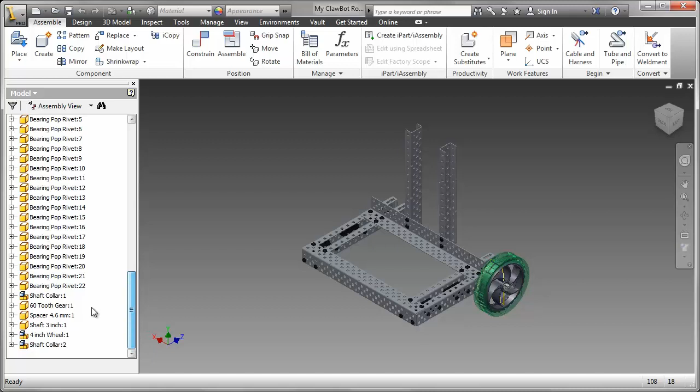With one wheel assembly created, we want to add the other three, but in a more efficient way. I'm going to use the same workflow that I used for the nut and bolt: select all of the parts in the wheel assembly, and then demote them or combine them into a sub-assembly. The name for that component will be 4-inch wheel assembly.

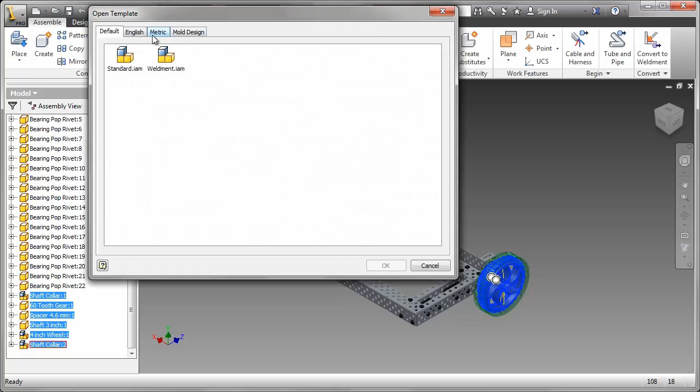I'm going to check that the template is correct. It should be an English standard inch assembly. Click on OK. We get some information, but that's fine, it's not a problem for us. And you can see all of those parts are now combined into a single assembly, and I can bring that into my model.

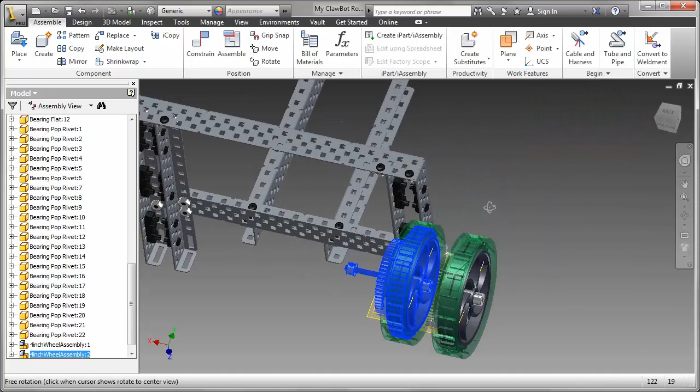Simply drag it into place. You can see all the parts are coming along. And all I'll need to do is apply one constraint, and that's going to be the insert constraint that offsets the drive shaft.

Select Insert, the circular edge. Keep in mind there are a couple of circular edges there, so be careful you get the right one. We'll be double checking this later. My offset is negative 0.375.

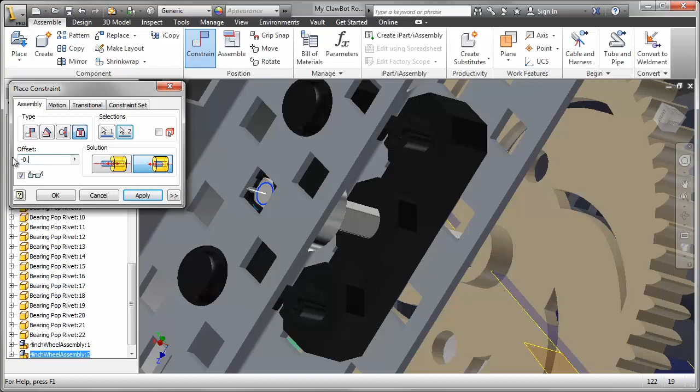That's a much quicker way of creating that second wheel assembly, and we can repeat that for the third and fourth one.

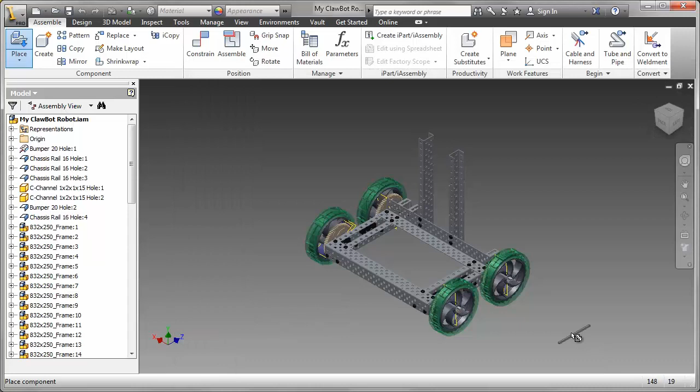To complete the drivetrain, I want to add one more gear. To do that, I'm going to start with the 3-inch shaft and place it in that center area. Again, I want to move and rotate that part so that it's easier to constrain. This is the area where the motor will be.

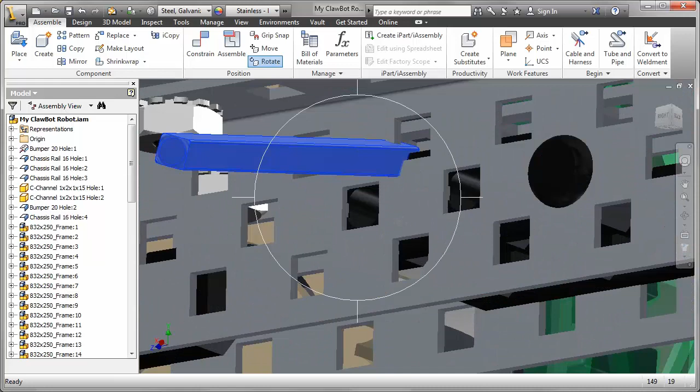In the previous ones my offset was 0.375. This one has to be larger so that the drive shaft will go into the motor and be rotated by the motor. So again, it's an insert constraint.

Select the circular edge. And again, change my solution, and in this case it's going to be negative 0.875. Click on OK.

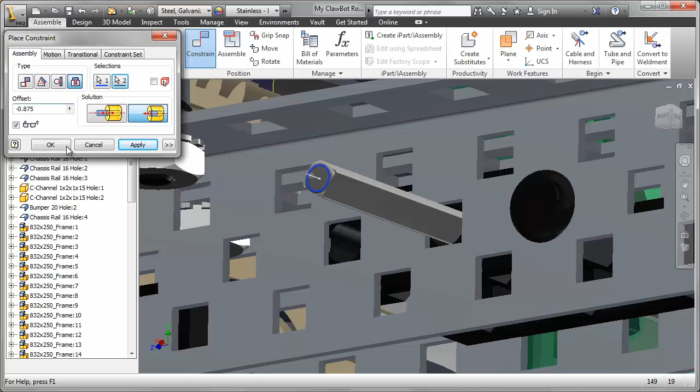So we've seen how to create the rest of this. We're going to be adding on a shaft collar. I'm going to be adding a gear. So here we can see the complete solution. I've added 2 shaft collars and another 60-tooth gear, keeping in mind to add those angle constraints so that the gear, the shaft collar, etc.

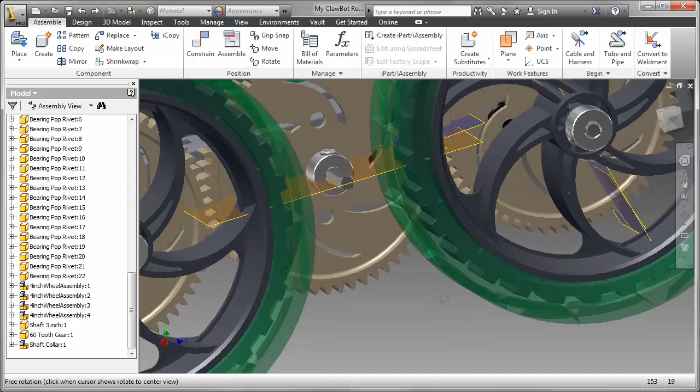All rotate together. But we do have an issue to deal with, and that is that we need to add a constraint so that these gears rotate correctly. I'm checking that the gears align correctly first of all, so that my selections on the insert constraint were good, and they look fine.

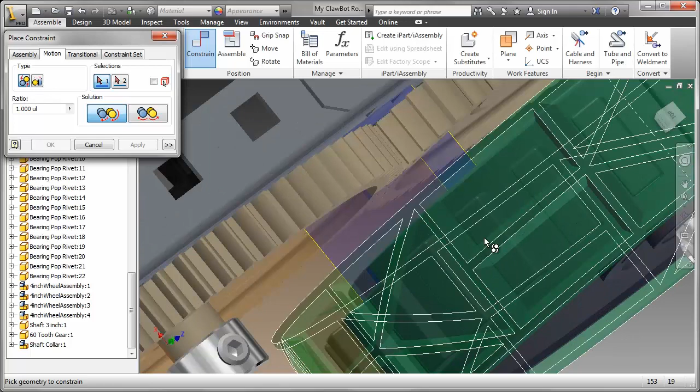I'm going to use a rotation constraint. Now in this case it's 3 60-tooth gears, so the ratio will be 1:1. A little later on we'll see a different ratio for some of the gears.

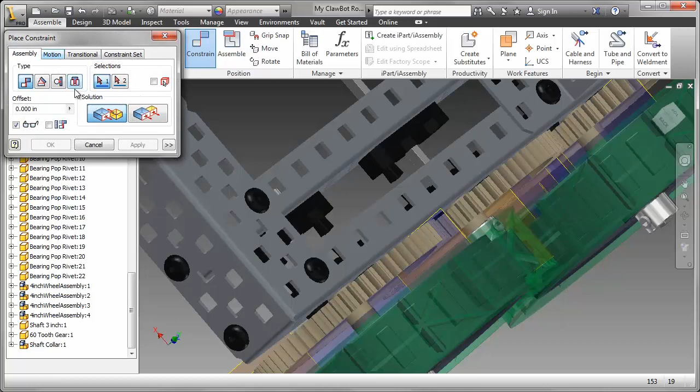Select 2 circular surfaces. I could have selected edges as well. I'm going to go with the solution as is. We'll check that in a moment. So again, motion, select that face, select that face, and OK.

So we're getting there. The next thing we need to do is align the gears.